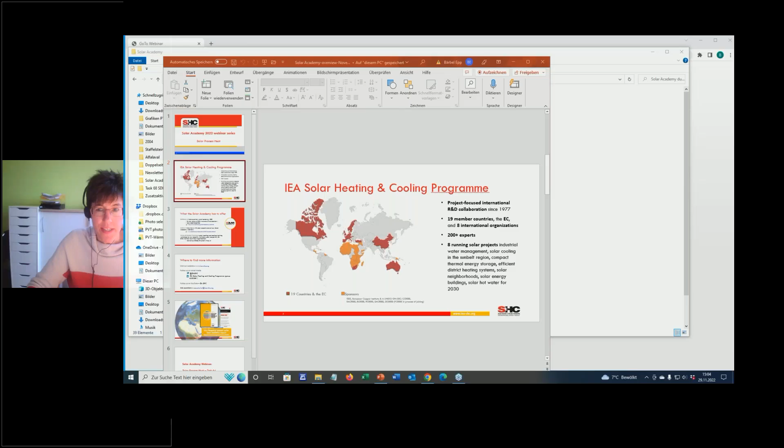Welcome. Yes, Arabella, thank you very much. Good afternoon also from my side. Yes, I will share with you some slides on what is the IEA Solar Heating and Cooling Program. Will this work? Oh, sorry. Can you share it again? Or was it already shared? We see your screen. And oh, you see my screen already? Presentation is there. I think you have to go back. My presentation is there. Sorry for that. Yep, there we are. Okay, sorry for that.

Okay. Yes, we have, together with ISES, a very nice and long-going webinar series. It's called Solar Academy IEA SHC. Today we have the interesting topic of solar process heat, and I will give you some insights on the IEA Solar Heating and Cooling Program. It's a research-focused collaboration. 19 member countries and 8 international organizations cover a big range of countries. You see them colored here on the map. You have the red ones, which are direct members, and the orange ones, which are members via sponsors.

More than 200 experts from industry and research work together on dedicated solar projects. So we have a lot of topics which are listed here, like water management, we have solar cooling in the Sunbelt region, we have neighborhoods, we have solar hot water for 2030. So we cover a wide range of applications in solar heat.

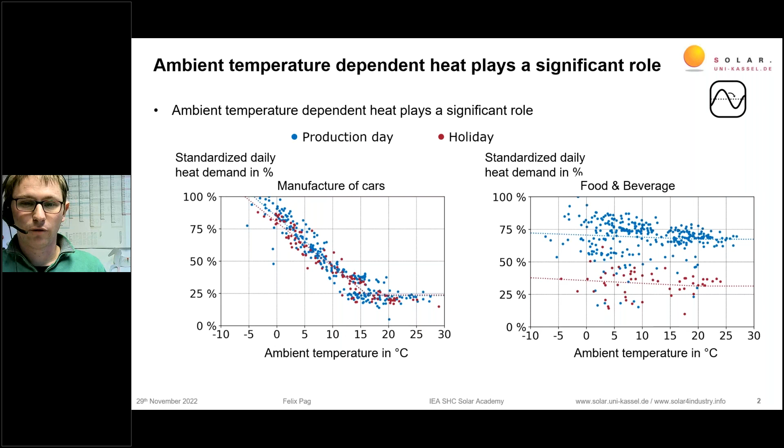In Subtask A, we did some more work on that, and we did a cluster analysis of more than 500 heat load profiles. Unfortunately, these profiles are mainly from Germany. We think that the basic results can be transferred also to other regions throughout the world, at least in those regions where we also have a seasonal behavior of the ambient temperature. And here in this diagram, you can now see the results of this cluster analysis. We have in blue the profiles which are very non-seasonal and flat throughout the year.

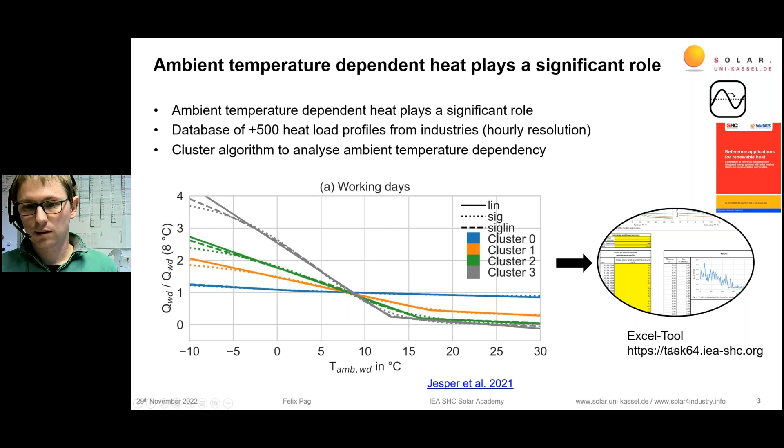And for different industries, you can see how the heat demand is really decreasing with the ambient temperature. More information on that, and because we think that is very important for the future system design, you can find in this deliverable, which is shown here, the reference applications for renewable heat, which is published on the task website. And there you can also find an Excel tool where you can make your own heat load profiles.

So I have already shown on the last slide this strong dependency of these heat demand clusters and the ambient temperature. And here in this picture, you can see the combination of the clusters and different sectors, and how the different clusters are distributed within these sectors. So to give an example, again here, the manufacturer of beverages. At the bottom here, all the profiles that we had, all these companies were collected in this cluster 0. So in these clusters we don't see any seasonal behavior, and that is very different in some other sectors.

For example, in the manufacture of computer, electronic, and optical products, where we see more processes which are related to the ambient temperature. Basically, this is very often space heating, but also very important are big ventilation units, which are often underestimated in their importance for the industrial heat demand.

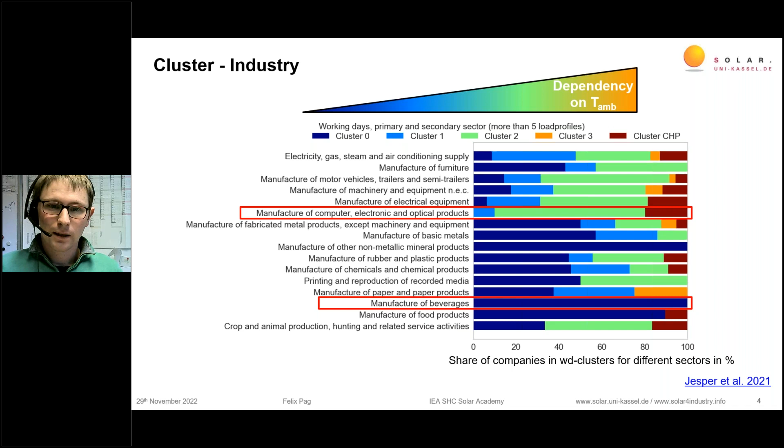One other thing that we took a look at in the subtask was the importance or the availability of roof area for solar collectors. Very often in potential studies, we found that the availability of roof areas is a limiting factor, but so far we could not quantify it. Based on the database that we had, we could make an analysis with GIS data from OpenStreetMap and analyze how often the roof area is really a limiting factor, and what is the influence on the potential solar fraction that we could reach with these solar collectors.

And the results you can see here in this diagram. On the y-axis, you can see the required collector area based on the summer heat demand. The solar system design is always made in a way to really meet the summer heat demand and not to produce too much excess heat in summer. And on the x-axis, you can see the flat roof area that we find based on the GIS data. One dot is always representing one of the companies in our database.

And in all cases where the company-specific dot is below these lines, then you know that the roof area is big enough to install that much solar collector area to really meet the summer heat demand. And the good news is that only 40% of the companies in our database had too small a roof area to install enough solar collectors. So basically, this is quite a good result, as 60% had enough roof area.

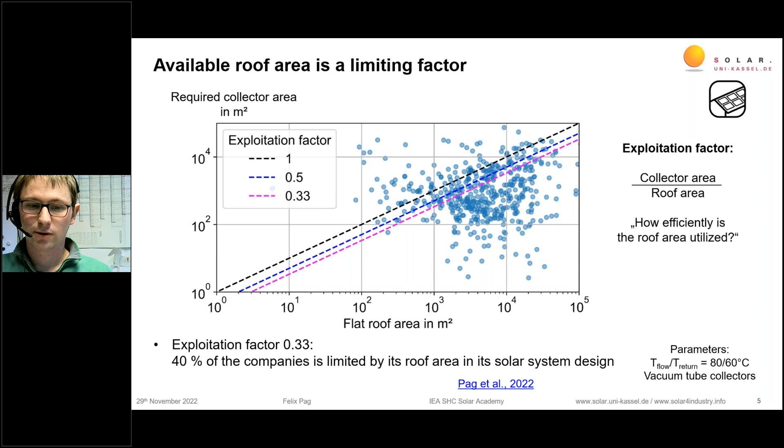So what is now the influence on the solar fraction, of both the roof area and the load profile? Here you can see, again, a combination of both analyses. On the x-axis, you can see the relation of the collector area that we calculated based on the load profile divided by the available roof area. And on the y-axis, you can see the solar fraction. Again, every dot is representing one company. And here the roof area is not yet seen as a limiting factor. So this is really just what is possible based on the load profile.

And we can see here, blue are the load profiles which are quite flat. So we see a high summer heat demand, and based on this, we can really reach a high solar fraction in the range of 30 to 40%. But the more seasonal the heat load profile is, the smaller is the solar fraction if we design the solar collector field according to the summer heat demand.

If we now also take into account the available roof area, then the picture looks a little bit different. If the roof area is a limiting factor, the solar collector area has to be decreased based on the available roof area, and then the solar fraction is partly massively decreased. This is especially the case in companies where we have a high summer heat demand, so especially all these blue dots here. And based on the median, you can already see the decrease of the potential solar fraction that we can reach.

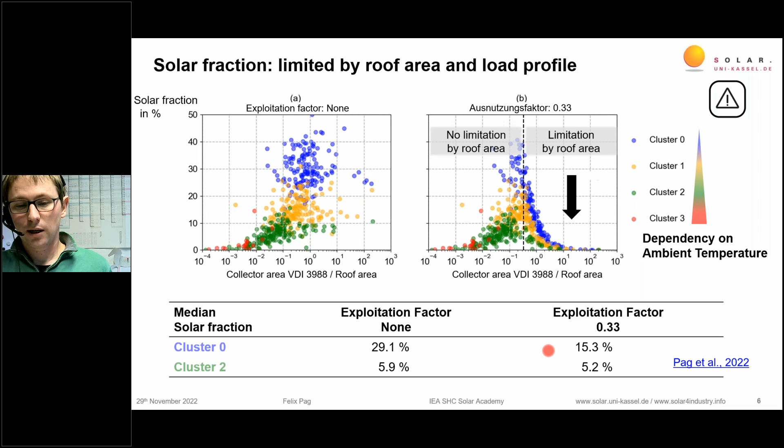So what's now about the combination of solar with other technologies, which is one basic part of the work that we do in subtask A. Based on the analysis of the load profiles and the available roof areas, I think it's quite clear that there are a lot of applications where we have to combine solar with other technologies, and we put an effort on the combination of solar and heat pumps in subtask A.

And we were quite surprised in the beginning of the subtask work that everybody is talking about the combination of solar and heat pumps, but if we talk about details and really how to design the systems, everybody has its own strategy, which is based on its own experience, but there's not yet a really established common system design methodology. So what we did is to analyze a lot of parameters with a simplified calculation model, really to find out what are the most sensitive parameters.

So as you can see on the right side, one basic idea was to have a look at different system designs. On the one hand, having solar collector field and heat pump completely in parallel, and then also two system designs where the solar collector field does a preheating and the heat pump ensures the set temperature, and vice versa, that the heat pump is doing the preheating and the solar collector field is designed to really reach the set temperature.

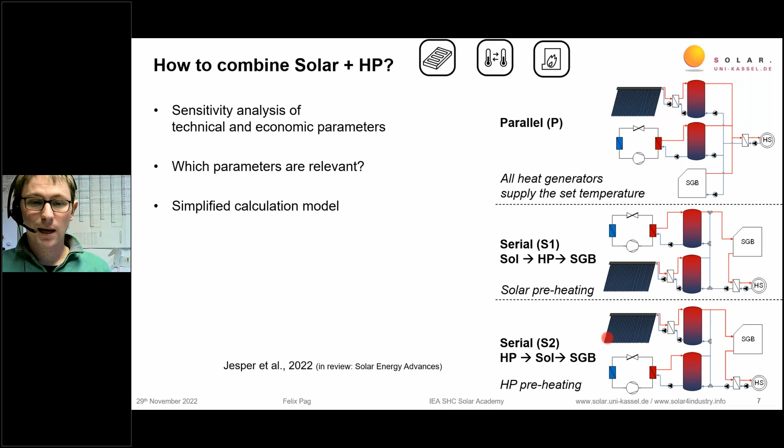And we wanted to find out which are really the basic parameters that are influencing our system design or our economics. And I cannot go into all details, but I want to show you one slide which is kind of summarizing what we did and which is going to be published soon, hopefully in a Solar Energy Advances paper.

Here you can see in all these diagrams the levelized cost over 20 years for the different system combinations of solar and heat pumps, and some parameters that are less important here at the top. So the location, the hydraulic concept, and also the annual load profile type are not that important for the economics of the system. Of course, you have different system designs and different solar fractions that you can reach, or renewable fractions, but for the overall economics, it really does not make too much of a difference.

But here are three other parameters that are really having an impact on the levelized costs. On the one hand, this is the daily load profile. So is the heat demand throughout the year more or less constant, or do we see a peak during noon, or at least during the day? That has an impact on the system design of the heat pump, and that you can see also here, shown by the heat pump capacity ratio, which is defined as the heat pump capacity divided by the maximum heat load, which we can see throughout the year.

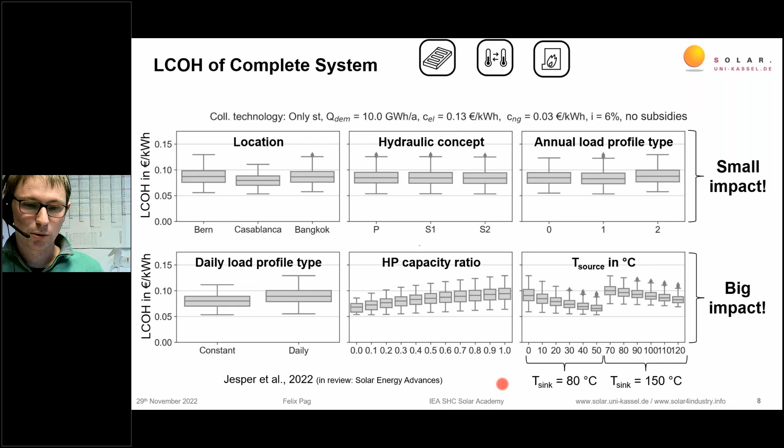And also quite clear, the source temperature for the heat pump has a relevant impact on the efficiency, and so also on the levelized cost of heat of the overall system. Again, if you're interested in more results on that, I invite you very much to have a look at this paper when it gets published soon.

So to summarize, heat load profiles in industry cannot be assumed to be constant, as is done very often. It really depends on the location that you look at, and on the sector of the industry where you want to integrate solar collectors. But the good message is almost all companies have a relevant summer heat demand. So there's always a role, at least at minimum, to cover the summer heat demand.

Another conclusion: the roof area is a limiting factor for solar system design, but the majority of the companies really has enough roof area, and that is always the easiest option, not always the cheapest option, depending on the availability of other areas. But nonetheless, it's quite important to see that roof area is not a limiting factor for all companies.

And one really important result based on our subtask A result is that we need new design strategies for solar heating plants, especially in combination with other technology, especially heat pumps, but also having in mind that the heat load profiles are very often not that constant. So if we have the heat demand in winter or the transition times, but the solar yield in summer, we still have to see how to better combine that to reach higher solar fractions or renewable fractions.

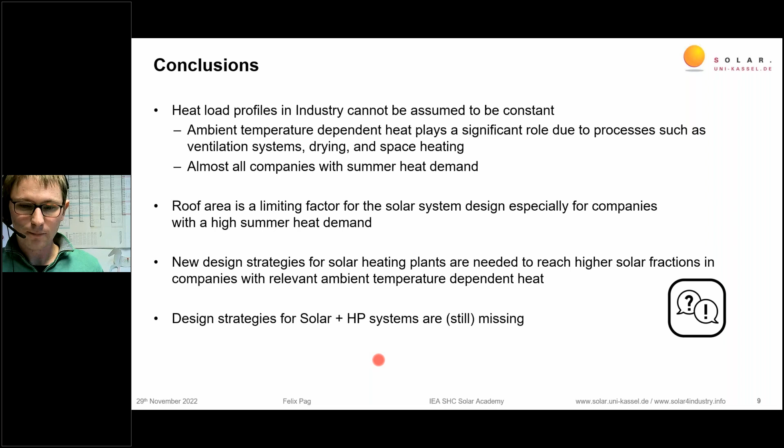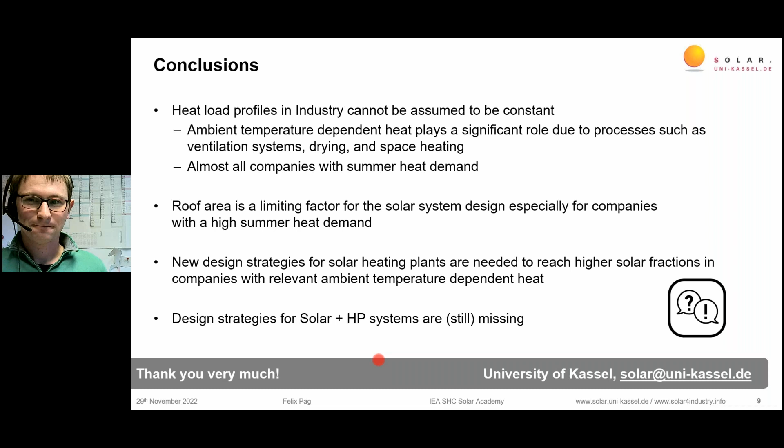Thanks. Yes, Felix, thank you very much. Very interesting. I think especially this hybrid combination, because we need to go to higher shares. So there will be always this offering of hybrid solutions in the future towards industry.

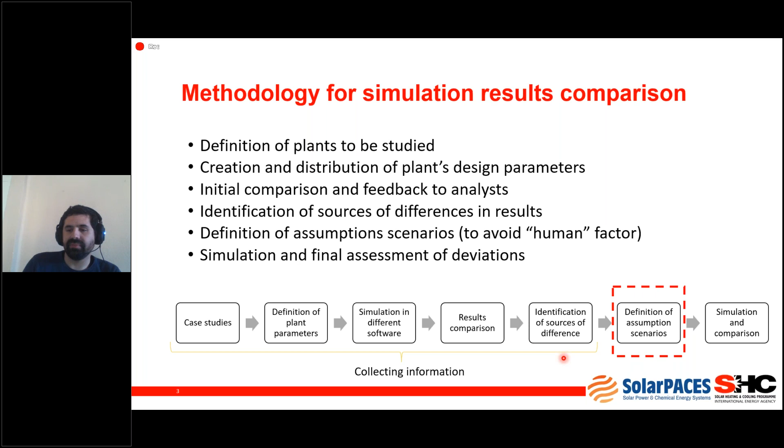Then with all that information, we defined some assumption scenarios. That being, we created in one tool a very detailed model, including everything possible, and then we started relaxing some of the constraints. For example, trying to emulate what happens when you cannot model something because of software limitation. We did that for all the case studies that I will present next, in order to understand how the technology impacts on it, how the load and the integration scheme also affect it. And from those results, we obtained the overall results. So it's a guideline that I will also show you.

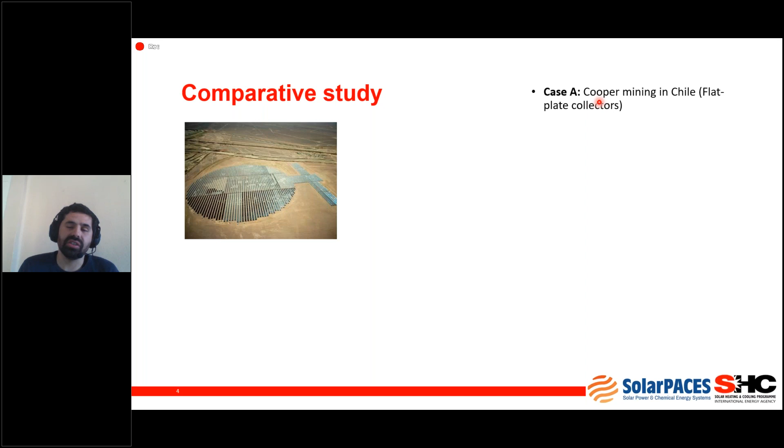So for the comparative study, we had 4 case studies. The first one is a flat plate collector plant, fixed, and it supplies heat to a copper mine in Chile. This is the picture. The second case is a flat plate collector solar field, but it has a one-axis tracking system to supply heat to a paper mill in France. And even though it's a simple technology, it was not easy to model in all the available software because it's not common to have a non-concentrating solar thermal system with a tracking system. So it was also interesting to do this.

This is a Fresnel collector to supply direct steam to a process. And again, a different technology with different temperatures, and also storing steam is a challenge for many softwares. And the last one is a parabolic trough that supplies heat to a dairy factory located in Switzerland.

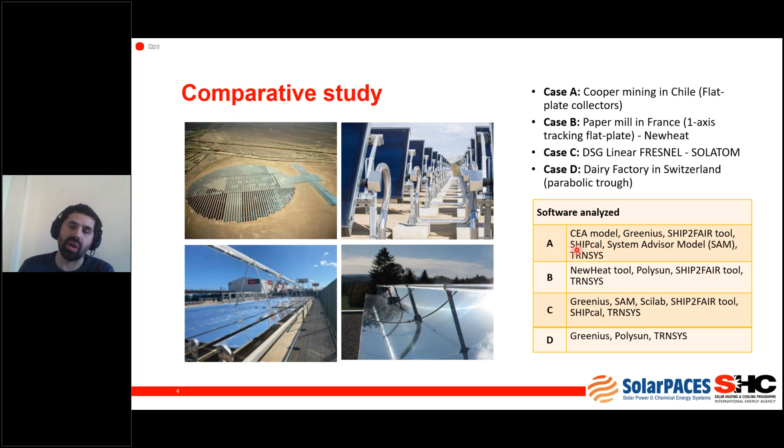So the table here shows the software or tools that we analyzed for each of the cases. Of course, more tools are better, but it was not always possible, mainly because of limitations of some of them. In addition, for example, for TRNSYS, where you can make a very customized model, we had different results depending on different analysts. So we also could kind of assess the impact of the human, and we wanted to avoid that in the later stage.

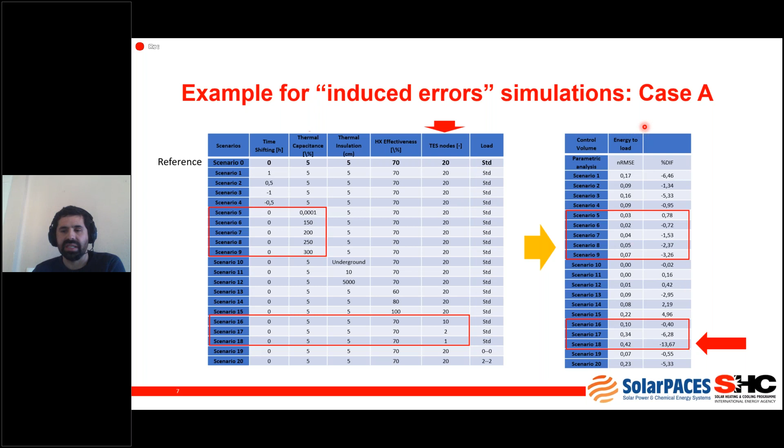Just to show you the hourly data, we created some residual value plots, and here we can show, for example, the number of nodes of the thermal storage, and even for 10 nodes, you can see that the overall annual value difference is not that much, but you have underestimation and overestimation along the day. So the total value, of course, is not that much, but on an hourly basis it could be important. And if you have a process where you are supplying this heat, that could also be a problem.

So this analysis was also done for all the parameters that we observed, and it is also reported, to understand or try to put more effort into those that you can see impact the most. For example, here also the effectiveness of the heat exchanger; it could depend on the parameters and also the technology.

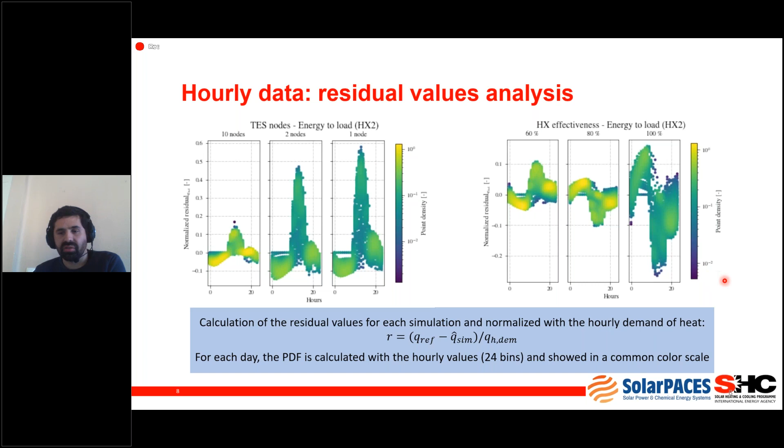An additional outcome of the work that we have done is to update a table. This was one of the outcomes of Task 49. We took this list of available software to simulate solar thermal systems and updated it. Of course, the software has improved in these years and has more capabilities, so we can see, for example, some of the features of the software.

They are sorted, and as I said, they are not ranked as to which is the best one, but you could see more or less if it could be feasible to model your system in some of this software. This is a complete table. Of course, if you have any input or feedback, we are very open to get it, and to add more software. If you have a software, we can also include it in this list.

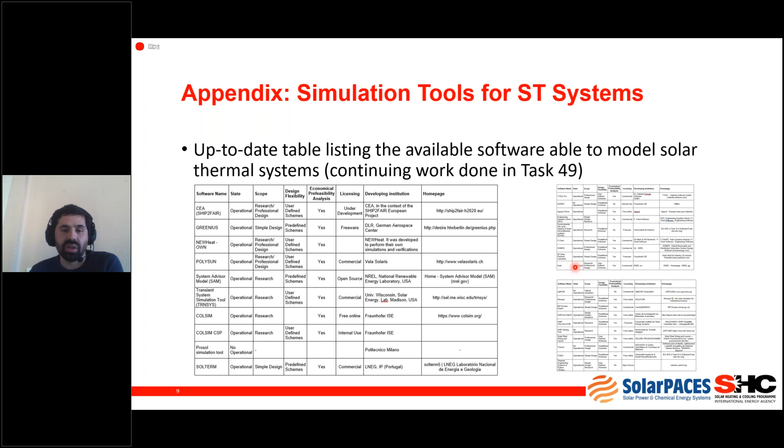Just the final remarks. I want to invite you to participate in the second stage of the task, which is next year. We will be working on monitoring the solar thermal system during the operation stage. Most of the work done was during the design stage.

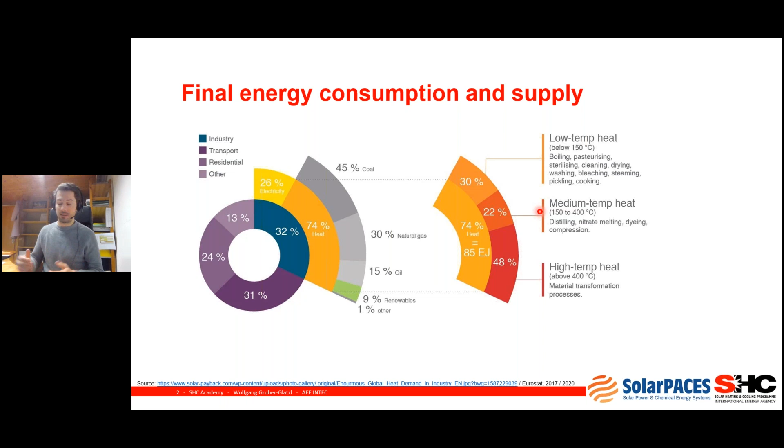Some people joining know a bit more about solar thermal, some maybe not that much, but of course we can think of a lot of barriers, problems, or challenges. But we wanted to focus in this task on the success factors for SHIP. So today I want to present some of these success factors from existing SHIP plants, what we have learned from our SHIP database, as Bärbel mentioned, and show some data and examples to see what success factors we can derive from them.

This is the link to our existing database, the URL ship-plants.info. You can see a screenshot of the map worldwide.

More than 400 plants have been documented so far. You can filter for countries, for operation time, industrial sector, unit operation. With this we mean different processes that are targeted. You can filter by collector area, by collector type.

Also point of solar heat integration, which was an important work of the previous task on SHIP, Task 49. You can see here an example of the different integration schemes on supply level or on process level. And last but not least, you can also filter by solar thermal engineering companies, so those companies that actually implement the successful implementations.

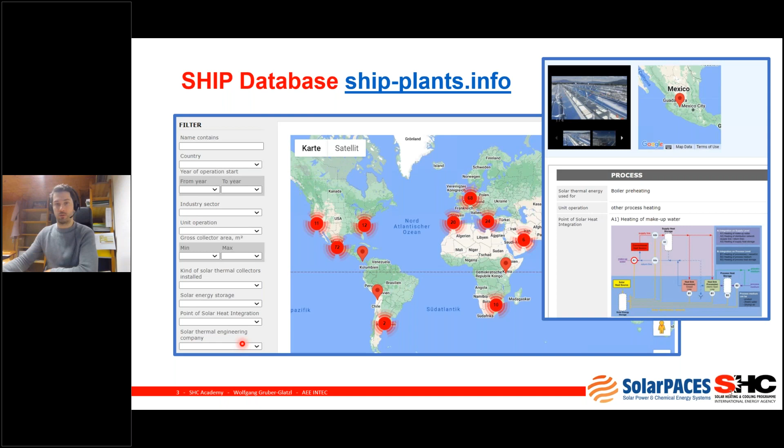This data from the SHIP database goes directly also into a publication that Bärbel has already mentioned at the very beginning. It's the Solar Heat Worldwide report, which is published also by our institute. Werner Weiss is the main author here, and I'm also contributing in terms of the SHIP data. So in March 2022, the last cutoff date, we had documented 394 plants worldwide.

In the meantime, fortunately, we could add a lot to the database. So we are already looking towards the next publication in 2023. More than 1 million square meters of gross area have been documented there. Looking at this chart with different size categories, we see that only 3 plants are in the largest category with larger than 30,000 square meters of gross area.

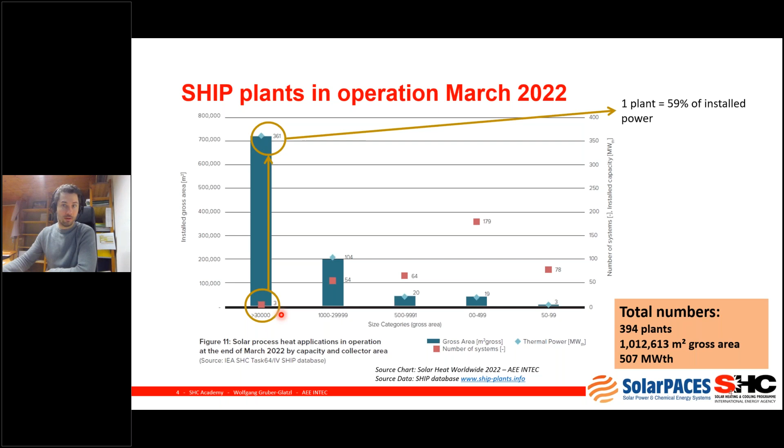And many know maybe that the reason is that it's related to one plant that has 59% of installed power of all SHIP plants. This is the GlassPoint system in Oman, which is very huge in comparison to everything else. So all the statistics are a bit difficult to show, because one plant of these 394 has 59% of installed power. On the one hand, it dwarfs what is happening at the other plants. It also shows the huge potential it can have if the right system is applied.

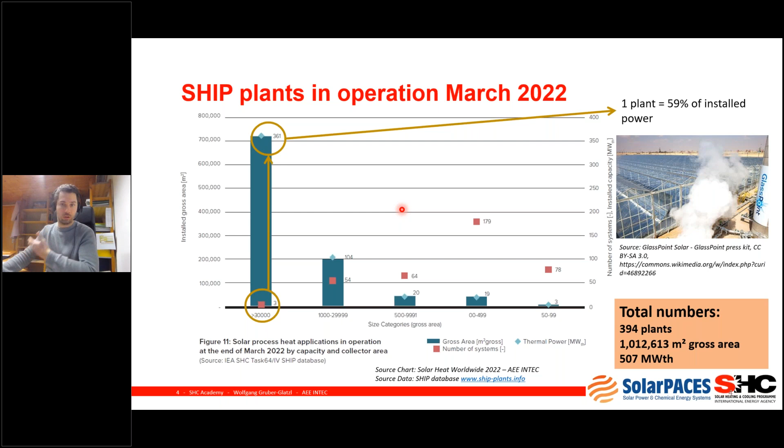But I also want to highlight that all the other plants are success stories, of course. And, as Felix has shown, there are many plants with a lot of roof area available for solar thermal. But one success factor here, of course, was the turnkey solution. GlassPoint is delivering steam, so it has not sold the collectors to the client, but rather it has sold the steam. So I want to highlight this as one success factor: this turnkey solution, selling heat, not collectors.

We are doing a lot of work with industries, not only about solar process heat, but also heat recovery and these hybrid systems with heat pump solutions. And of course, for industries, long-term energy security has gotten increasingly important. So having a stable energy price is an increasingly important selling point for industrial clients. They are looking for safe energy supply.

Another example is the malterie in Issoudun in France, which was implemented in 2021 by the collector manufacturer Savosolar and the ESCO Newheat. Newheat is selling the heat to Boortmalt, which is the malterie here. I'm very happy that this plant is realized. I was at this plant 4 years ago doing a feasibility study, and now it has been implemented. So I think it's a great success that this was possible. It's also one of the largest collector fields in Europe and worldwide for SHIP.

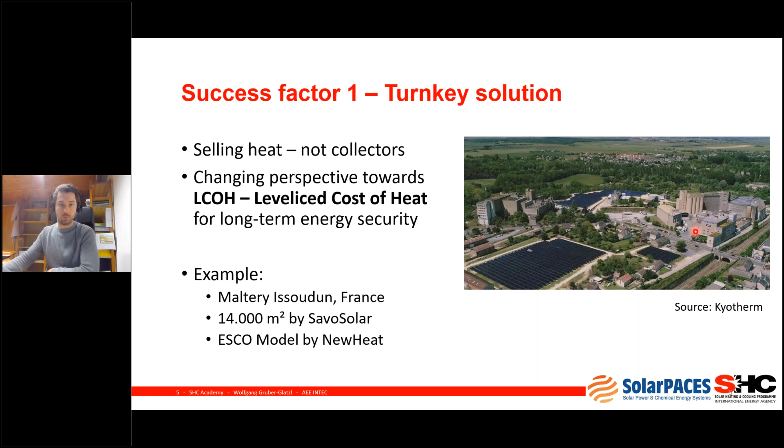So looking again at the perspective of the end users, they want to know if SHIP is a reliable solution, if it's a simple solution, and if they are the first one to implement, or if it has been done before. We are R&D and suppliers in this research task, and we can say yes, SHIP is reliable. Simple, one can argue, but still it's a simple technology that can be implemented, and there are experts that know how to do it. And no, it's not the first time it is implemented; it has been done before.

Then the end user is looking at the financing, at the CAPEX and the OPEX costs. You can see that SHIP is rather cost intensive upfront, so very high CAPEX cost, but low OPEX cost. So we try to avoid looking at payback time, but rather look at levelized cost of heat, because this shows more the true cost of solar heat in industrial processes, especially if you can provide a turnkey solution.

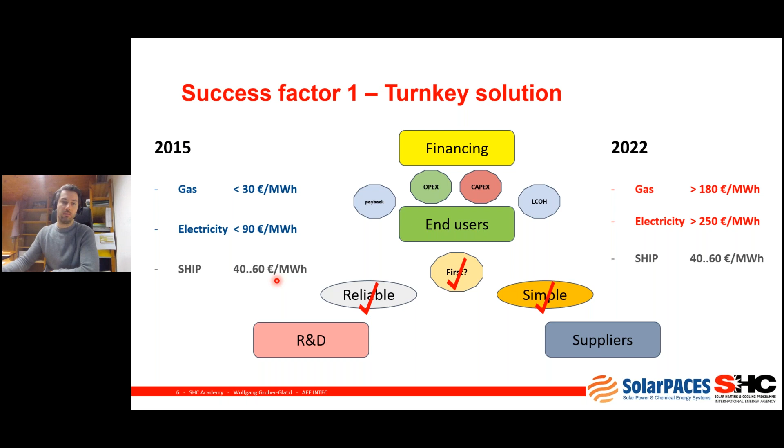Of course, especially for Europe, but also other regions, this has changed dramatically: looking at 2015 compared to now, 2022, the gas price has increased significantly, while SHIP has more or less stayed on the same level. So this is, we think, an important selling point. On the one hand, secure energy supply, increasingly higher renewable shares, which is very important, and lower prices.

What we have seen in this last year is more implementations of systems with higher collector temperatures. So Fresnel collectors, parabolic trough collectors, but also this example, vacuum flat plate collectors that can provide up to 180 degrees. We have seen multiple implementations there. There, the integration is simply easier. You can integrate on the supply line on the utility side of the industrial plant.

You're talking with the facility managers and not so much with the production managers that are dealing with the product processes, really making the product. So it's much easier to actually integrate a larger share of the heat and cover a larger share of the heat demand, which is also reflected in the economy of scale. So you can install larger systems.

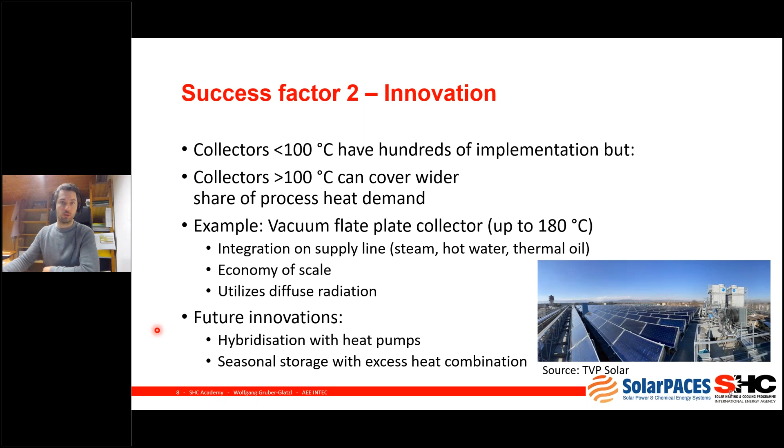But besides this, we can see that the food sector is also a very interesting industrial sector for solar heat for industrial processes. And we can see that some companies have really achieved a high number of implemented systems. So they have multiplied what they have done before. They have a high standardization in their workflow.

And here I want to highlight the success story in Mexico with basically two companies that have the highest market shares there, and they are in competition. They have reduced planning costs because of doing similar integration schemes. Again, when we look at the integration concepts, a lot of integration on supply level at low temperatures was possible. With lower solar shares, and this is why also smaller systems, but still high standardization, high multiplication.

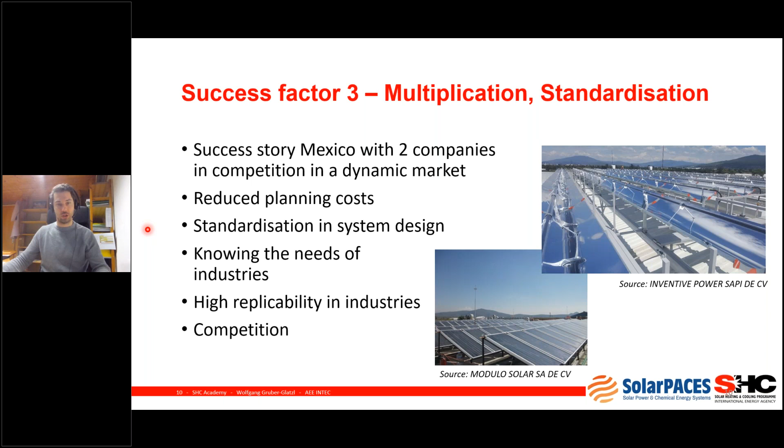I wanted to start with all these three success stories, just a few examples to highlight this. And now going to what we are doing in Task 64. We have seen subtask A with Felix and subtask C with Alan. We from AEE together with Fraunhofer ISE are leading the guideline to market. So we really want to make sure to promote SHIP the right way, to promote it as a solution for the industry.

This is the goal we have here. So the big picture is addressing the relevant aspects and barriers, and place SHIP as a core part of hybrid industrial energy systems that has been presented before, being a platform for researchers, technology suppliers, project developers, and end users. So also today is a good chance to promote this again in the final year of the task.

If you're interested in our activities, please also contact us, and we can collaborate here, which would be also very interesting for us in the final delivery, which we are doing, which is a position paper on SHIP. And I think the more voices we can include there, the better it is to speak for everybody.

These three aspects I want to highlight: innovation, competitiveness, and financing options. This is also reflected by these three success factors I've mentioned. So innovation is still necessary. SHIP is a technology that can be implemented, as is shown in the SHIP database. Competitiveness is important. And increasingly looking at financing options. So those were just a few examples.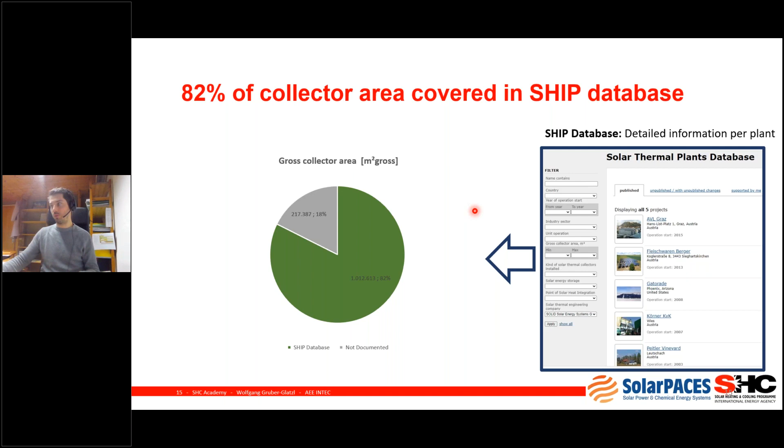Actually, we can cover currently 82% of the collector area that is mentioned by the solar suppliers. So there's a gap, but also we have rather larger systems documented here. And of course, some will always be missing. We rely here also on all of you in the audience. So if you know of any plants, then please contact me. This would be very helpful. We try to build up collaborations throughout the whole industry to make sure we can get all the data that is needed for that purpose.

Also, you can profit from this information. You can go to SolarPACES for pictures and fact sheets, so for basic information on suppliers, and you can also go to the SHIP database, where you can get a bit more detailed information on the actual location, also some pictures included, more information on the size of the systems, the storage system, the process integration type, lessons learned, and other information on the plants.

A small teaser also from our side: we want to relaunch our SHIP database. It will be the same name, but we implemented it many years ago. Now it is time to relaunch it a bit. It will have more features on filtering, a new map layout with plant locations, automatic charts and data exports for other researchers to use this data for their market research or analysis.

And like it is now, you can add and edit new plants. We are always looking at any addition and will then publish it, to make sure that only plausible data is published. And we will release this in 2023. It's currently in development. So with this, I want to end my presentation.

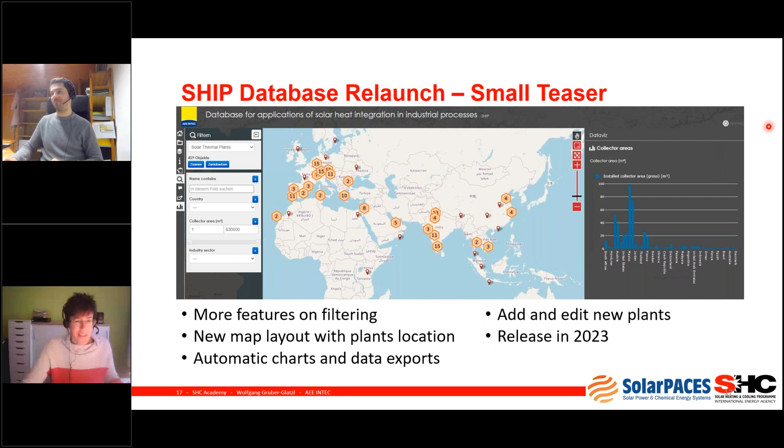Yeah, thank you, Wolfgang. Very nice to hear about all these success factors. We had at the beginning of your speech some questions on what these success factors are, how to define them, but I think you have done this very well in the course of your presentation. I think it was a bit provoking to talk about successful SHIP plants, but you mentioned some really nice case studies, and your database is for sure very important for the whole SHIP sector to develop.